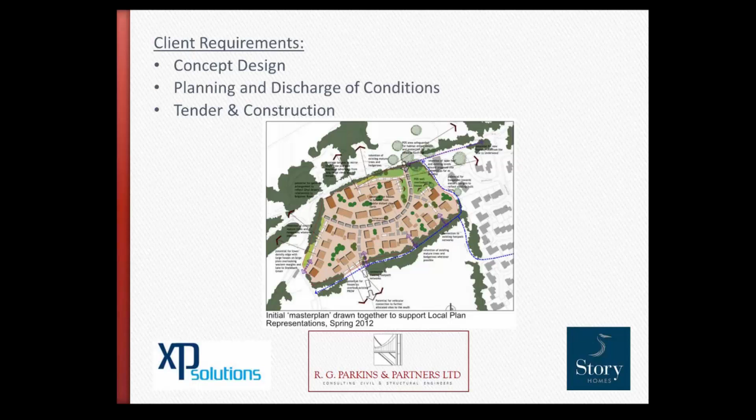Many of you will be very familiar with this process, but there's clearly a huge amount of work involved with taking an awkward farmer's field on the edge of Kendal through to a high-end housing development with desirable homes. Looking at the site itself, obviously in Kendal, for those of you who don't know, the area is highlighted on the screen there for you.

You'd probably be pretty hard pressed not to have heard of Kendal if you followed the news and various publications in December 2015 and the devastating effects of Storm Desmond. More specifically, it's a 2.1 hectare piece of greenfield land on the western fringes of Kendal.

Interestingly, this site's also a gateway to a possible larger development which several of our clients, Story included, are already looking at.

From the blue outline you can see on the screen here, you can see the size of this total land allocation, which is approximately 190 dwellings over 10.8 hectares. The site we're looking at and we'll be talking about today is this red outline here.

It was originally intended for 40 houses, but this figure's gradually been reduced to 34. It's relatively low density for the size of the site, but it reflects the large area of undevelopable land. So as you can see, it leaves a possible further 150 or so houses over the remaining 8 hectares, which is a pretty considerable site by anybody's standards.

Crucially, the site we're focusing on here will provide access to further sites as defined in the local authority land allocation plan, with only an emergency vehicle access route intended from the east. This obviously emphasises the importance of successful progression of this scheme.

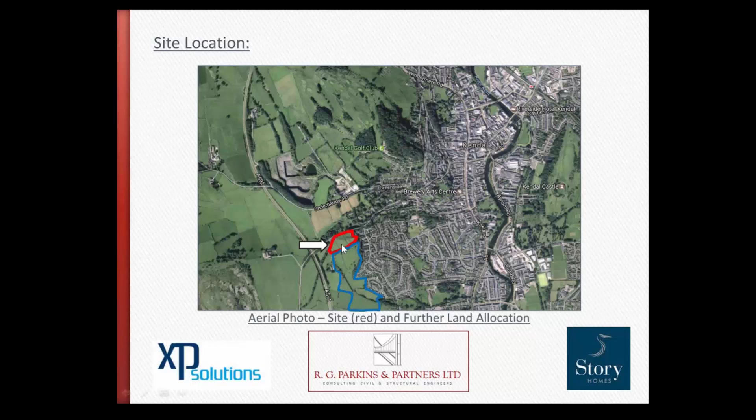All sites have their own challenges and constraints, but this particular one really did seem to go above and beyond in challenging us. The topographical survey on the left shows instantly how steep the northern corner of the site is, with gradients in excess of 1 in 3 in places.

And as if this wasn't bad enough, as I've just touched on, the initial draft plan, which is to the right there, put the main access road straight through the middle of this particularly steep area.

We did try and steer away from this, but the access point was clearly defined in the land allocation documents. Possible revisions were coupled with concerns over loss of housing density as a result, and complications over land ownership, so we ended up having to make it work as was.

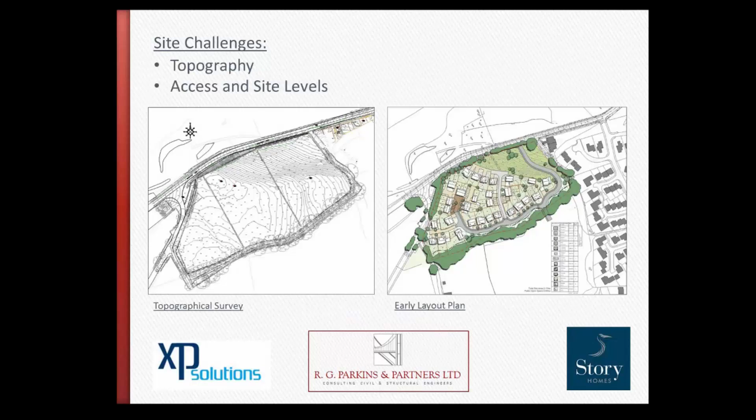The site's in fact so steep in places that initial site investigation was restricted due to access and genuine concerns over getting the plant in and out safely. We established that the vast majority of the site is underlain by very shallow topsoil, as little as 300 mil thick, over fissured limestone. It's quite unusual to see a trial pit like the one on the right that reached bedrock pretty much on the first bucket load with a mini excavator.

This was actually my first trial pitting job with RG Parkins, and not exactly what I expected when I arrived at site.

Interestingly though, we were able to break out some of this material and achieve successful infiltration tests. The fissured material, shown here on the right in the smaller pictures, was broken out with a mini excavator relatively easily, and we achieved successful percolation tests into it.

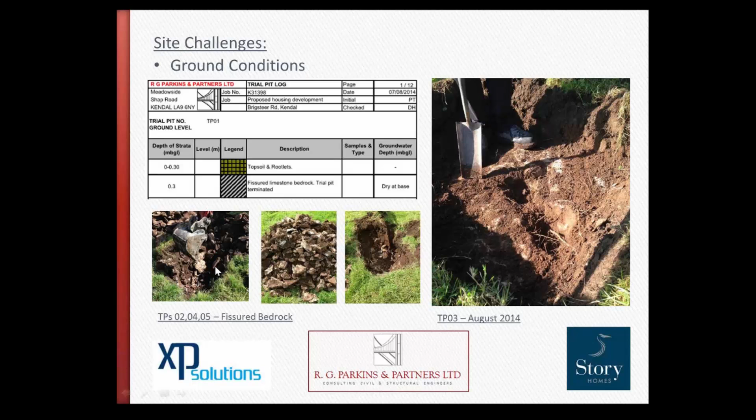Further challenges with the site on the drainage side: essentially no positive surface water drainage or a watercourse in the surrounding area. Foul water drainage is present, but there's currently no highways drainage along Brigsteer Road.

The map here shows an apparent watercourse to the north of Brigsteer Road, opposite the site, but the image on the right shows what's actually there. That photo is taken on the far side of Brigsteer Road - this is the site here, just with the road off to the right. As you can see, the watercourse is named Blind Beck, and it's a pretty apt name, in that there's no dry weather flow and it's really little more than a waterlogged depression.

There's no surface flow in anything other than extreme rainfall in there. And just for good measure, it happens to be landlocked in third-party land with an owner who's actively against the development.

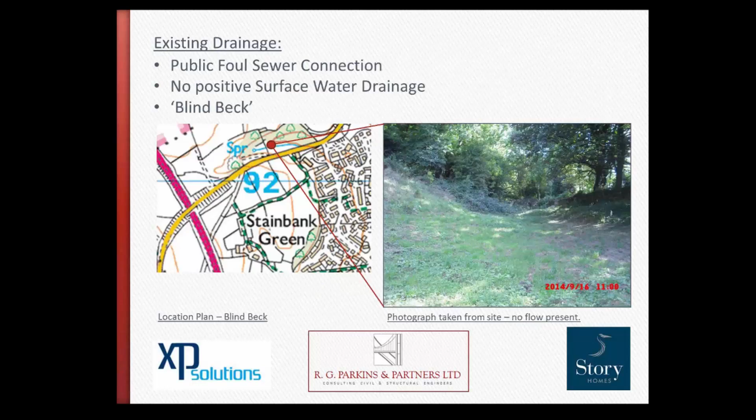The site's in flood zone 1, largely due to its elevated position, but the immediate area is not entirely free from flooding problems. Lack of existing highways drainage is likely contributing to flooding issues such as this on screen, taken in December 2015 during Storm Desmond, resulting essentially from a high volume of surface water flow completely overloading the drainage systems. It's a fairly common sight around the UK in extreme weather.

This shows the junction to the north of the site with an existing development, something the local authorities were aware of as a problem spot. This particular image was actually uploaded to a site campaigning for the refusal of planning permission. Just to clarify, this is the junction, as highlighted on screen, looking back up towards our site, which would be on the left further up.

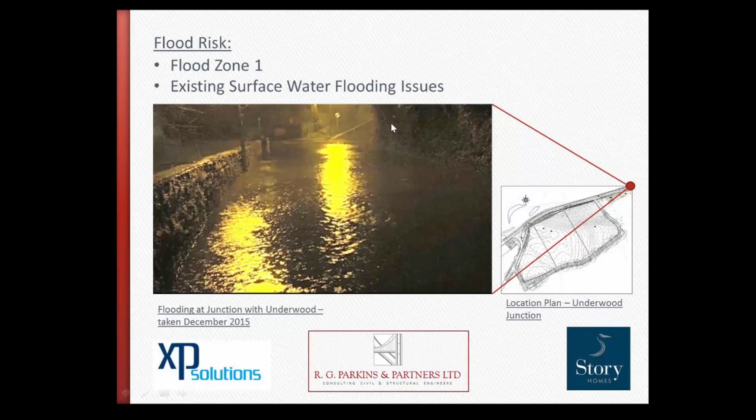On the subject of planning, the approving authorities for the scheme are South Lakeland District Council for planning itself, who then consult with Cumbria County Council in their capacity as the Highways Authority and the lead local flood authority.

In supporting our clients through these planning applications, I'm sure we won't be the only consultants today finding that local authorities are demanding an ever-increasing level of information at this stage, bordering on pretty much detailed design for the highways and drainage aspects.

In assessing the proposals, Cumbria County Council currently refer to the non-statutory technical standards for SuDS, published by DEFRA. Those of you familiar with this will no doubt agree it's a pretty tough ask to get through all three pages of it, but we did, and I'm sure many others have.

Joking aside, we understand that Cumbria County Council's official SuDS guidance documents may be under development, but are unlikely to be formally issued in the immediate future. We also expect, based on various discussions, that this will be largely based on the CIRIA SuDS manual. As a result, principles in the SuDS manual are generally to be followed where possible.

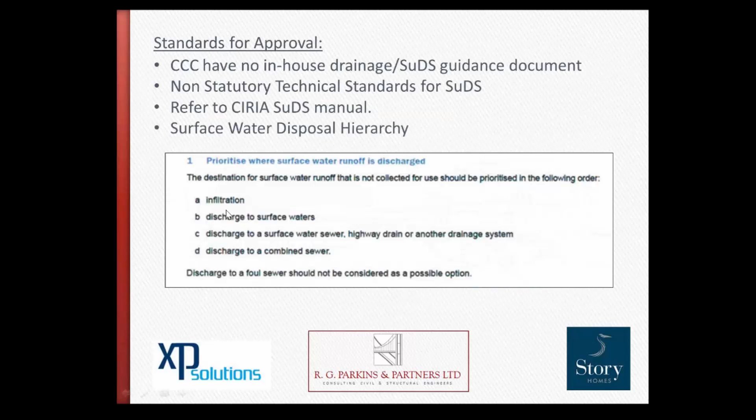Cumbria County Council are particularly keen to see the surface water disposal hierarchy outlined in the SuDS manual implemented, as are other approving authorities. For those unfamiliar with this, the intention is to prioritise the method of surface water disposal in order of perceived sustainability, with each method on screen to be explored fully before moving on to the next - from complete infiltration right through to discharge to a combined sewer - ruling out options in order before proceeding.

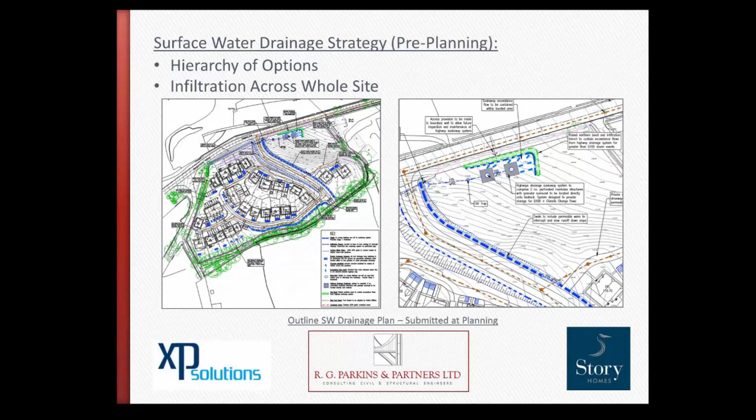Our surface water drainage strategy, which we submitted at planning, was in accordance with this SuDS hierarchy, proposing to utilise infiltration systems for the majority of the site, percolating into that fissured limestone we saw earlier. These are extracts from our planning drawings showing the layout of the surface water drainage features. We don't have time to run through everything, but we'll cover the important aspects.

These essentially included use of individual plot soakaways and permeable block paving for the parking areas, private drives and the highway. Where gradients prevented the use of permeable block paving, primarily the main access road into the site, we propose to use a conveyance swale to discharge water into a deep manhole soakaway at the site entrance. For those not familiar with the conveyance approach, it essentially forms a localised depression immediately adjacent to the highway and footway, which, together with the crossfall of the road, forces surface water runoff into this purpose-designed drainage channel.

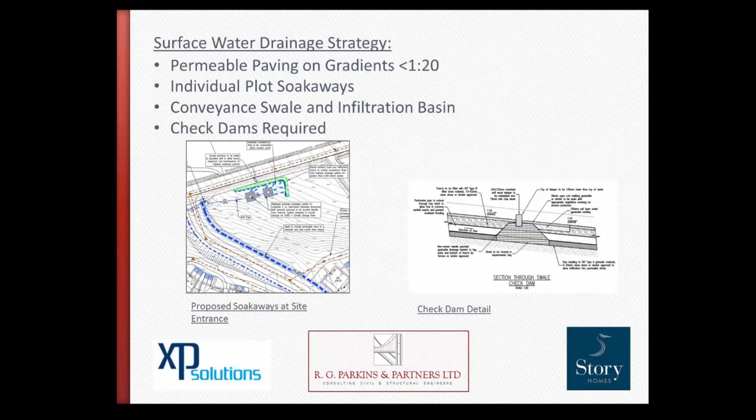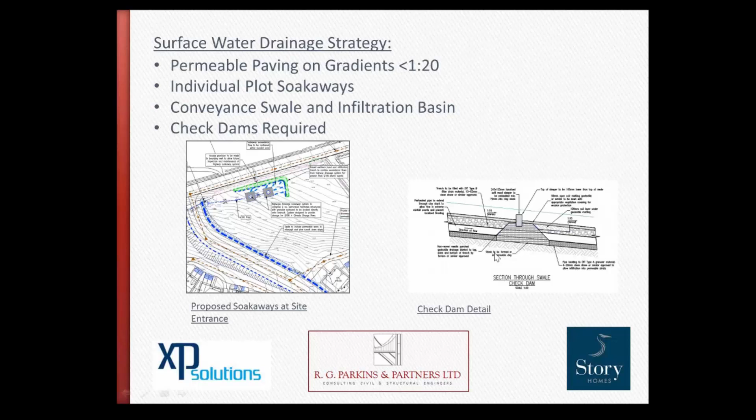So to overcome this, we introduced a series of check dams to encourage the water to cascade more gradually down the slope, allowing some surface storage in high rainfall events. The simple detail on the right shows how we achieve this by placing a physical barrier at 6 metre intervals down this length of swale. The idea is that by preventing water from flowing freely down, we utilise at least a triangle of storage, hopefully getting some infiltration and reducing the conveyance speed.

Coming back to planning and approvals, I think it's fair to say if there's one thing we've learned is important in moving these types of schemes forward, it's consultation with the authorities from an early stage. It's something we're understandably keen to do here given the slightly unconventional approach. From the outset on this one and on other schemes, Cumbria County Council has stated they do not wish to adopt new highway gullies if they can possibly be avoided. This includes discharge to swales, and is largely due to their existing maintenance burden and the water quality benefits.

As a result, they're looking to see direct conveyance to the swale. Despite satisfying this with the detail we've just seen, a request from the flood authority to install a petrol interceptor within the site caused confusion - I'm sure those involved wouldn't mind me saying a short-term falling out over the rationale of it. There was also a request from the lead local flood authority to improve the drainage along Brigsteer Road, which you can see on the screen. This was largely due to the flooding issues down at the site entrance that we saw at the beginning of the presentation. Ironically, this was done with a network of 10 new adopted highway gullies, but in fairness, that was pretty much the only option.

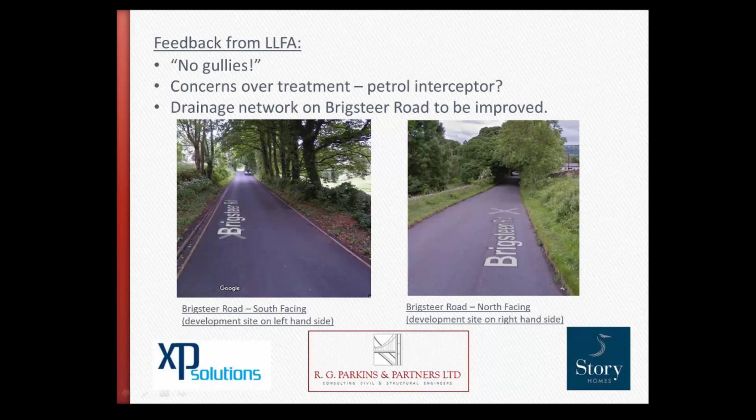To cut a long story short, the scheme was actually rejected at planning first time around, citing highways and access issues. Rejection came as a surprise, given positive pre-planning consultation and somewhat contradictory comments regarding the access location, which was the main reasoning for the refusal of planning permission, but had originated from the SLDC land allocation plan. As you can imagine, Story Homes took this decision to appeal, and planning permission was then granted - something of a relief all round, especially given what was at stake with the potential further allocation sites.

Post-planning, we undertook further trial pits with the intention of verifying infiltration rates for the infiltration feature at the site entrance, to allow our detailed drainage modelling. Unfortunately, this then forced a late design change due to the drastically different conditions in an area of the site where we were facing the biggest challenges with access.

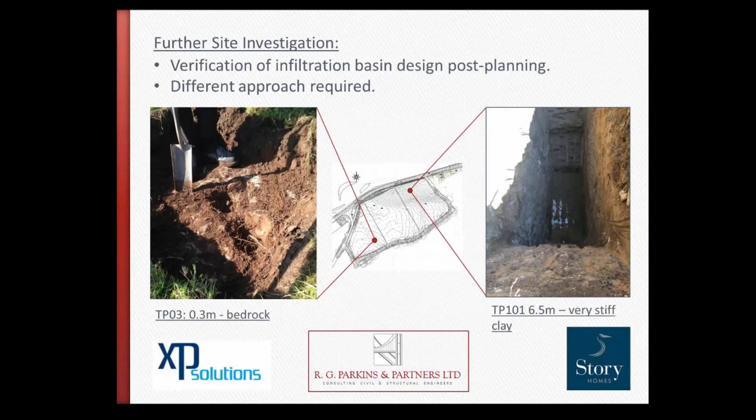Picture on the left you've seen already, the shallow bedrock pretty much at the surface, and then on the right, looking down at the base of an excavation from the top, we have 6.5 metres of very stiff, almost mudstone-esque clay, with the beginnings of some groundwater ingress that you can possibly make out in the base there.

Which is obviously not exactly ideal for an infiltration feature. As a result, we had a revised drainage strategy for the main access road. Just to clarify, the remainder of the site using permeable block paving and individual soakaways remained as per the planning drawings. It's just the steep main access road that required a different approach following the trial pitting.

So to do this, we switched out the infiltration feature for a detention basin with a flow control device. We managed to agree with Cumbria County Council that we'd discharge the highways drainage at a controlled rate of 3 litres a second. This limit was imposed by Cumbria County Council on the basis of greenfield calculations. We did argue for a higher rate, but 3 litres was what we agreed.

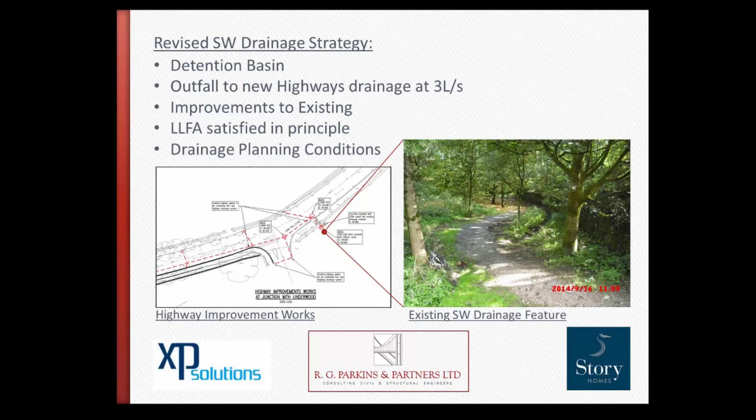So, in a nutshell, we're increasing the conveyance capacity under the footway here by adding a larger pipe, and we're also introducing this network of gullies which will add some additional flow, but pretty negligible. So hopefully a win-win situation in alleviating existing problems and draining our site in a sustainable way.

Adoptions are always key on these types of schemes. The swale and detention basin on this one, despite being heavily influenced by Cumbria County Council, were actually declined for adoption due to concerns over their maintenance.

And at present, we go as far as to work on the premise that no soft landscaped areas will become adopted highway, purely and simply because the Highways Authority are apparently already overstretched with their existing maintenance responsibilities. Consequently, the swale and basin remain private, which introduces a third-party management company, and ultimately the residents will have to pay a service charge to cover this maintenance.

Highways have agreed on this one to adopt permeable block paving on the minor access road, which is everything from this junction into the development. This is all to become adopted highway. This hasn't always been the case in the past, as I'm sure others will have found, but it's encouraging to see this being supported on this scheme.

We've got section 104 in place for foul water drainage, but surface water drainage is not discharging to the United Utilities sewer, so there's no further requirements for United Utilities there.

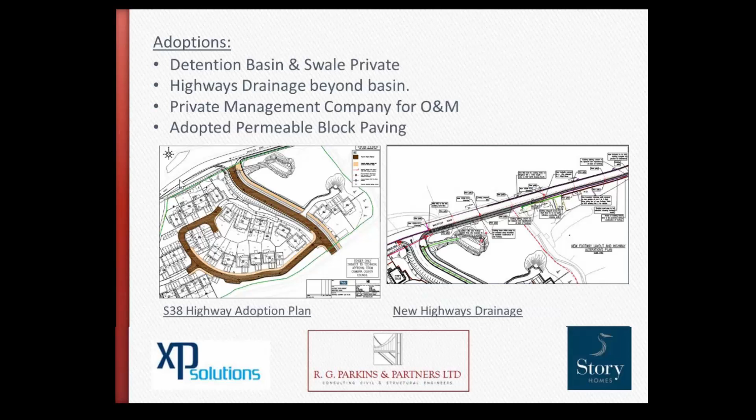Highways drainage along Brigsteer Road should be adopted by Cumbria County Council from the flow control chamber, which will be just downstream of the detention basin, including all this new highways drainage.

Planning conditions introduced at the time of the appeal decision detailed that drainage modelling must be undertaken to essentially demonstrate what we were proposing was suitable, and fair enough.

As you can imagine, there's some pretty unusual challenges associated with designing and modelling a swale on such a steep site. When we're looking at swales, typical examples tend to look something like this on the left, rather than attempting to bring a swale pretty much perpendicular down this sort of slope.

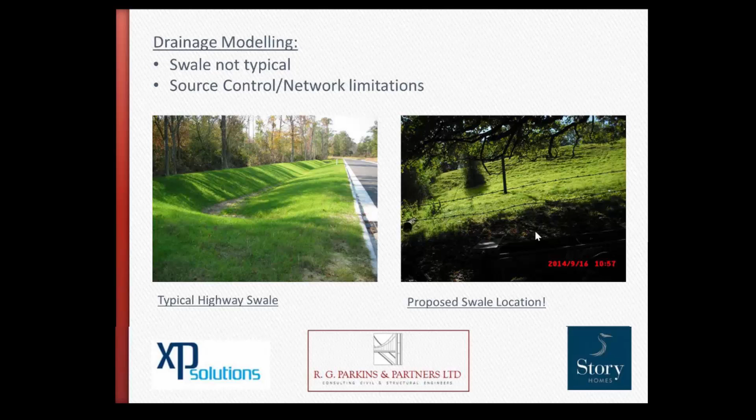This image was taken from the footway on Brigsteer Road, looking back up into the site, approximately at the site entrance. On this and previous schemes, when we're looking at a swale on such a steep slope as this, we use multiple swale sections divided by check dams, as we touched on earlier, with direct inflow from highway and footway.

This introduces problems with modelling, and the swale was also specified as a partial infiltration system with a perforated pipe in the base, again, difficult to model. Previously, we'd used the network module of MicroDrainage for this, but ultimately we felt we weren't using the right tools for the job in attempting to manipulate it to give us the data that we needed.

I'm not suggesting anybody adopts this approach on the back of this, but to model the swale in network required each section of the swale, so every 6 meters, to be modelled as a separate conduit with an associated flow control and storage structure manually inputted. The process is obviously time consuming, and any further layout alterations required significant work, so it's obviously not a cost effective or time effective approach.

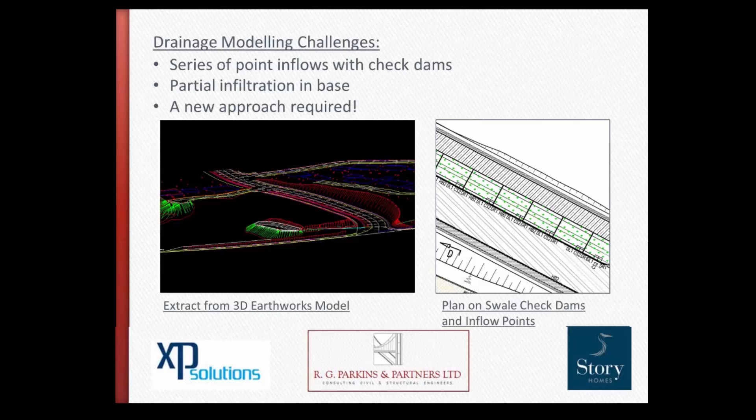So why do we pick MDSuDS as a tool to overcome these challenges? In short, the capability to model SuDS truly in 3D and the increased sophistication in analysis that we were looking for. The software was actually launched a few months before we began attempting to model this, and we were fortunate enough to be aware of that at the time. Essentially, the ability to properly connect SuDS features in a 3D site model was and very much still is something that we were drawn to. Again, I won't attempt to list all the features of the package here, as XP are best doing this, but it certainly offered what we were looking for, and it came with increased confidence in the analysis results as a consequence. We could also see the potential for efficiency improvements using what's essentially a fit-for-purpose package.

From this, you can imagine we obviously took the plunge, invested in the package, and I think it's fair to say, as with any software, it's an initial learning curve. But fortunately, we did have a large amount of support from XP Solutions at this stage in order to get this software up and running and hit the ground running with it.

Crucially for us, this was followed up by on-site training with Max and a detailed discussion of the direct project application of the software, and we looked at this scheme in particular. Perhaps important also to note at this stage that we currently use another common earthworks modelling package, which is outside of the XP Solutions suite and will obviously remain strictly anonymous.

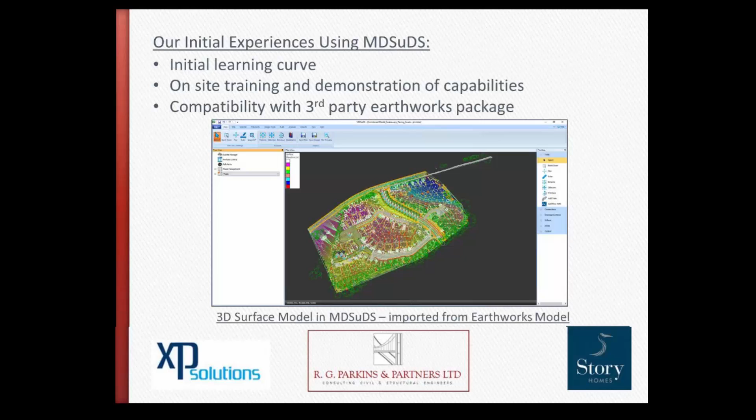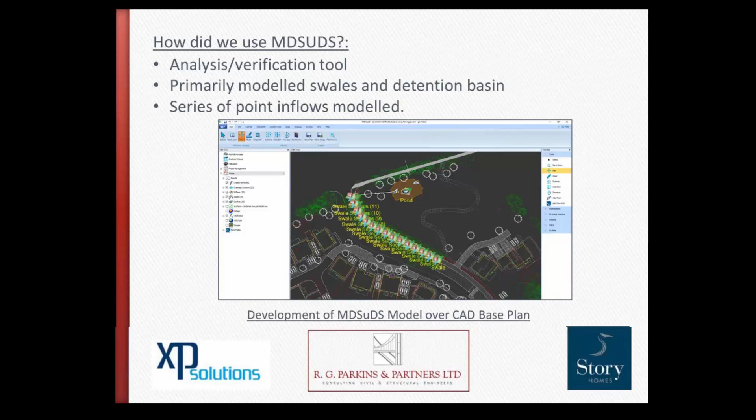Due to the stage of the scheme at which we adopted MDSuDS, we primarily employed it as a verification tool at this particular scheme. We use MDSuDS primarily in modelling the swales, and the geometry of the swales has been developed beforehand using network, as we said, in our 3D earthworks software. So it was essentially verification of this design that we were principally concerned with in MDSuDS on this job.

Just to recap again, highways runoff enters the swale via a series of inflows, the carriageway and the footway. The contributing areas were easily assigned in MDSuDS based on the areas draining to each section. So you can see the sections of swale being added here with the various inflows and flow controls, and then the corresponding area draining to each.

I think one of the major advances for us in this process is being able to apply this over the top of the CAD plan, which you can see in the background here, and it really is helpful to be able to keep track of what you're doing rather than just having references and coordinates as in other packages.

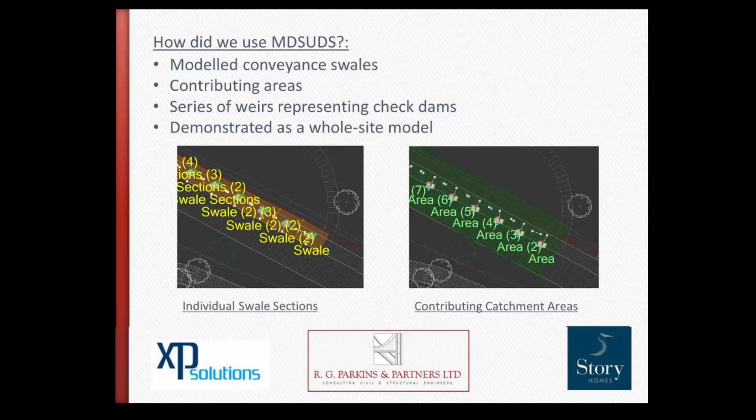Hydraulically, the swales modelled as conveyance swales to simulate a worst case scenario where we're achieving zero infiltration prior to outfall to the detention basin at the entrance. This was due to the steep gradients of the site and the real possibility of underlying ground in the trench there becoming temporarily saturated. We decided to model under these conditions to ensure resilience within the system and make double sure we're providing adequate storage in the basin.

Conveyance from the point inflows along the swales is modelled as a series of weir control structures, simulating the check dams we touched on. This prevents pass-forward of flows from one model swale section to the next before reaching a specified level, with zero infiltration rate in the base.

Under this design scenario, we would not expect water to enter the infiltration trench and hence the below-ground perforated pipe. No allowance was made for this in this run, but MDSuDS is capable of it, which we'd look at in a less extreme design situation. We felt in this case it was a true reflection of what we were likely to achieve. The orifice on the right represents the pipe from the final swale section to the detention basin.

Due to the stage of the scheme when we began using MDSuDS, the work already completed on soakaways and permeable paving with the MicroDrainage modules wasn't directly repeated here. You can bring everything into the model, but due to time pressures we just modelled the swales. This is something we'd look to explore more in future, but the crucial aspect was linking the different swale sections in 3D.

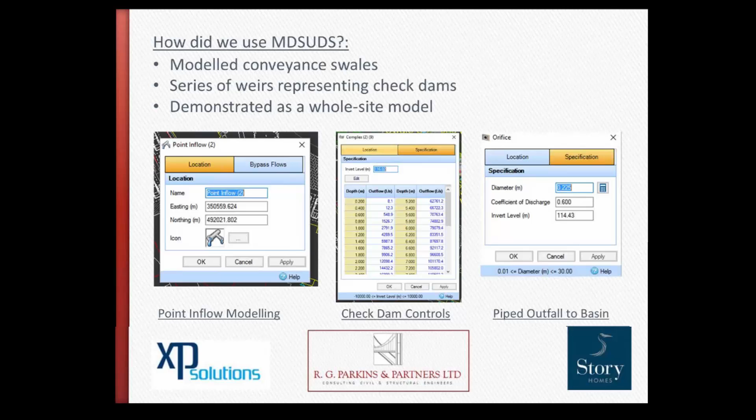In terms of results, the deluge function, routing a 50 mm rainfall event onto the site, identified an issue with longitudinal gradients of the main road, resulting in a small change to the drainage design. We're confident this would have been spotted at some stage, but it demonstrates the power of the function in performing sanity checks as well as complex modelling.

The graphics on screen give a visual indication of this, showing various depths of water accumulating in areas of the site. This also identified an issue at the site entrance with water not actually reaching the swale, and some separate ponding elsewhere in the development. All of this was then dealt with in the next iteration of detailed design before rerunning the analysis.

The good news was that the swale as originally designed was deemed adequate for the design storm events, and due to the stage of the scheme, the geometry was pretty much fixed already. There would have been some small room to modify this had space been an absolute premium, or had we looked at it at an earlier stage. We'll look at this in future schemes when we've got more freedom with the layout.

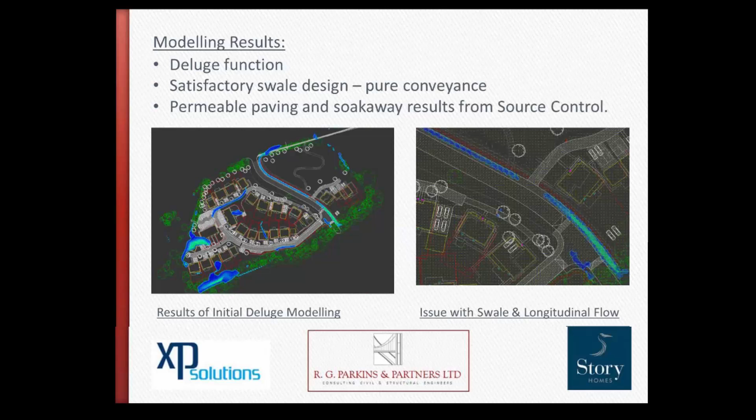Similarly, the basin and outfall were analysed with some small adjustments to storage volumes and levels. From this, comprehensive outputs, similar to those you'll be familiar with in the MicroDrainage suites, were submitted to the local authority as a detailed drainage report to Cumbria County Council, which resulted in the discharge of the planning conditions. We can only assume they were reassured by the level of modelling and information provided.

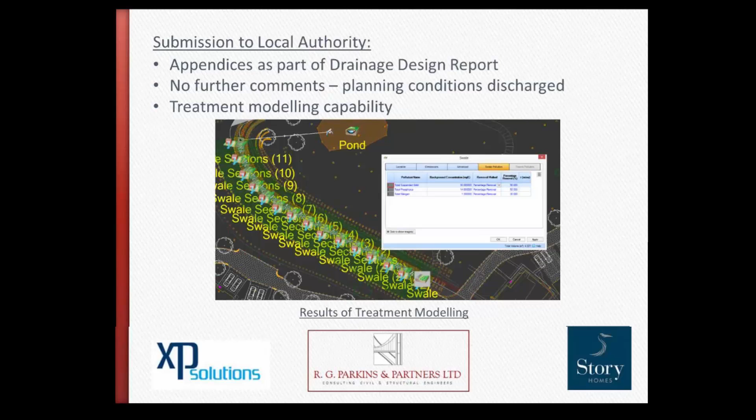Interestingly, no further mention of the petrol interceptor. As you can see on screen, numerical modelling of this aspect was undertaken in MDSuDS, which demonstrated that sufficient treatment of highways runoff will be achieved without a petrol interceptor.

So where is the scheme today? Highways and drainage planning conditions have been discharged. There are some ongoing but separate issues with Section 278, the highways, challenges at the site entrance, and a new public footpath that's been created there. These are yet to be resolved fully, but a groundworker is due to be appointed shortly, anticipating a start on site around April this year. Viability is still acknowledged as a concern, largely due to the access and the 278 works, but it's possible this is being looked at partially as an investment to enable the future allocation we looked at the start of the presentation.

To summarise, we only used MDSuDS detailed design as an analysis tool on this scheme, which was perfectly satisfactory at the time and a huge improvement on what we already had. But we can also see significant potential in using the software at feasibility stage to establish a workable drainage strategy. The benefits in terms of efficiency and accuracy could be substantial from this. Taking a holistic approach to drainage assessment, modelling everything in one place, gives us greater confidence in the design as a whole.

Previous schemes have been designed piecemeal, with individual elements in source control and network, etc. But bringing everything together is obviously pretty attractive. Ultimately, in an industry where designs and particularly drainage proposals are under ever increasing scrutiny, I think numerical verification of

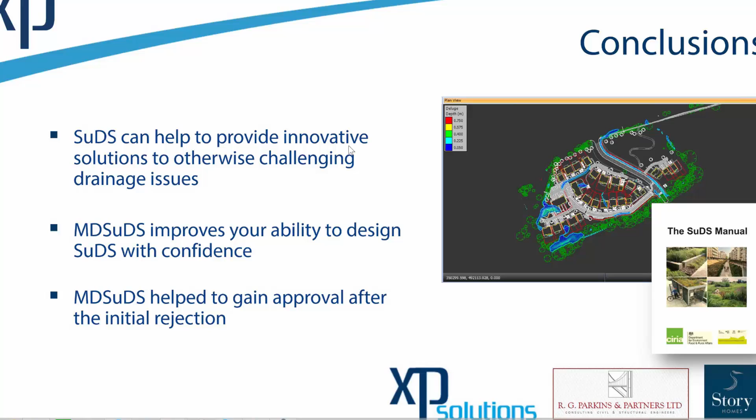Just in conclusion, the key points that I drew from this, and to sum up really, were how SuDS can really provide those innovative solutions even on such difficult sites, and this is all providing early consultation with all of those stakeholders. I think that's one of the emphases that I hear, and it resonates across the country when I travel, is early engagement. So again, credit to everyone involved on engaging at the early stage with this.

Certainly using the latest technology, backed up with that appropriate support and training, does help improve the delivery. It was really pleasing to see that the MDSuDS did help to provide those sanity checks, as well as gaining the all-important approval at the end of the day after that initial refusal.

And the teamwork involved, I mean, the key thing for me again is it really emanates right the way down through from the client and below, and it's absolutely key. So the final outcome, when you have the right attitude from the client, the can-do attitude, certainly looking towards the future, which is a credit to them, as well as quality engineers like RG Parkins Partners and Peter and Toby and the team there working diligently on such issues.

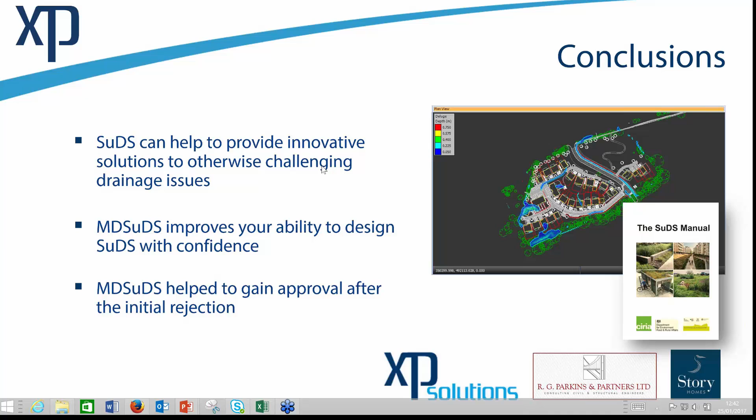The final outcome is growth, both in terms of competence and confidence, not just on this but for future projects. We really do value your sharing these experiences with us. It was excellent, thank you very much.

In terms of upcoming events and improving ourselves for the future, we're busy with training. Max, Mike and I are traveling the country doing a lot of off-site training, but we also run regular events here at the Newbury Training Centre. The next ones will be on the 30th of the month, a day's training on Course H, MicroDrainage training, which is the auditing and checking kind of course. We have a lot of local authorities, water companies, and senior engineers who want to check what's happening before submitting their final technical submissions.

We're then running a series on the 7th to 9th of February covering the basics, Course A and Course B. These typically fill up very quickly. The more specialized courses run every other month. Course C is the graphical interface and slightly more advanced modeling course, working with the DrawNet functionality and also adding in swales, as Peter's shown us here, into the network model, plus copying and pasting whole branch lines and working more efficiently and quickly.

If you go beyond the design and you're looking at flood risk assessments or existing flooding issues, this lends itself to the XPSWMM and XPSTORM modeling software, and we have 3 days of training on that coming up in the middle of the month. So happy Valentine's Day for those that arrive on the 14th. We don't have chocolates and flowers ready yet, but we have 3 excellent days of training with the team here.